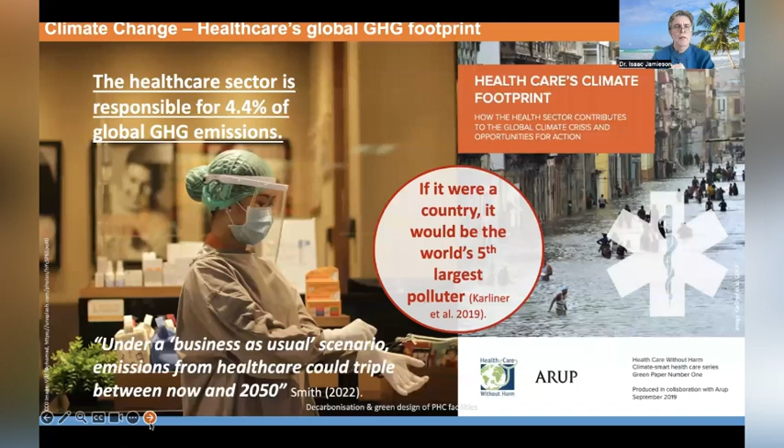One of the effects of climate change is the increasing prevalence of heat waves, and the effects of these are far worse during high humidity conditions, where it's more difficult for the body to cool down. It's been shown that the highest wet bulb temperature humans can typically survive in for up to 6 hours is around 35 degrees centigrade.

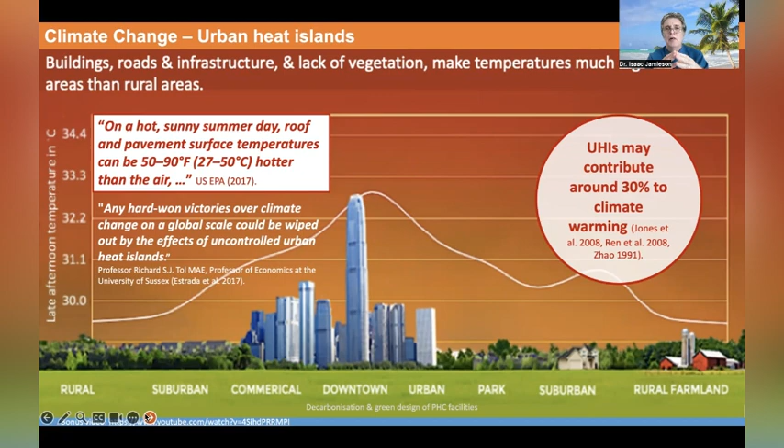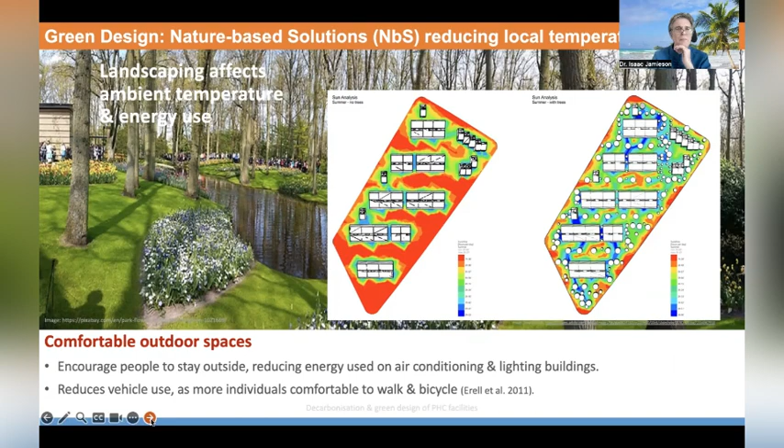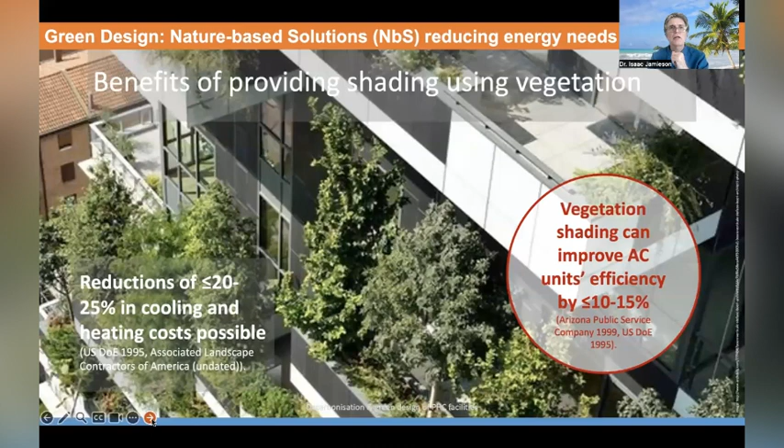So the kind of outer landscaping and designing that we have for buildings and the surroundings can make a big difference. With regards to the buildings themselves, if you have vegetation providing shading for them, it can help reduce both the cooling and heating costs by up to around 20 to 25%. And for areas where you have excess heat, shading the AC units can improve their efficiency around 10 to 15%. So these are significant changes that can be made using nature-based solutions.

And it's been shown that for buildings of 3 stories and less, you can often have a 5 to 15% reduction in electricity use during summer periods because of the reduced cooling need that's brought on board by the use of the green roof.

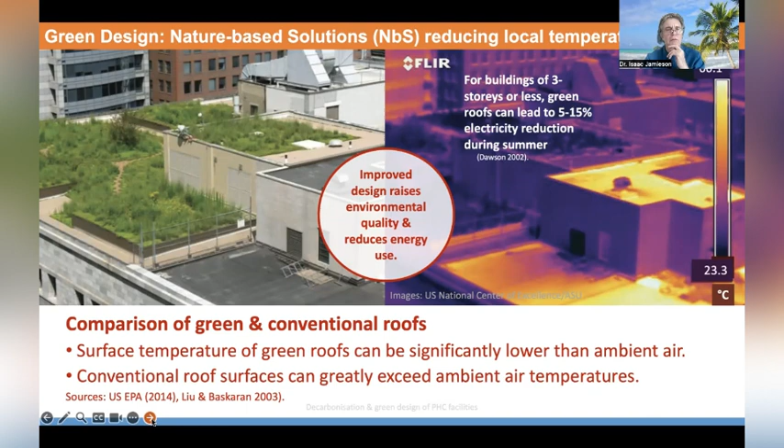Green roofs can actually provide significant additional advantages as well. They can help act as capture areas for rainwater to hold them during extreme weather events. They can also be used for growing food to increase food security.

A further benefit of this is that it's been shown increased contact with nature can help improve the human immune system. So you're getting a whole raft of benefits being created by this additional initiative.

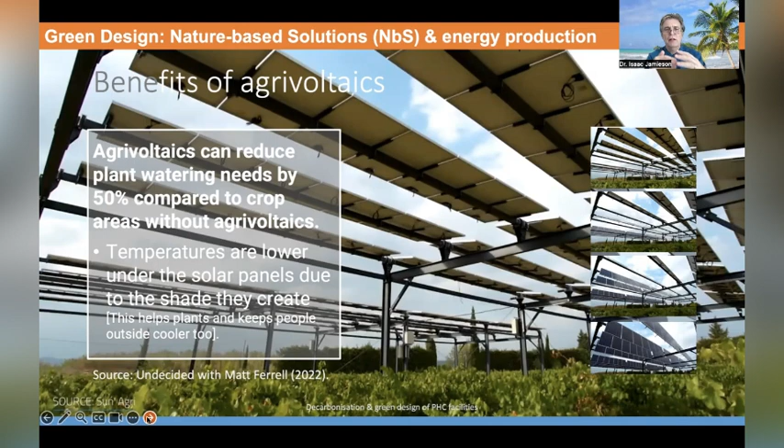Taking things even further, you can have green roofs that produce food that also produce energy for you. This is basically the agrivoltaics process - agriculture and photovoltaics being used in the same location. With the addition of photovoltaic panels, you can actually reduce the watering needs of the plants, and give them shading during specific times of the day. With systems such as the one shown here, they're actually adjustable, so you can alter the angle during the day so the plants get the correct amount of light and shade they need to optimize their growth. That can also help protect them during strong rainstorms, etc.

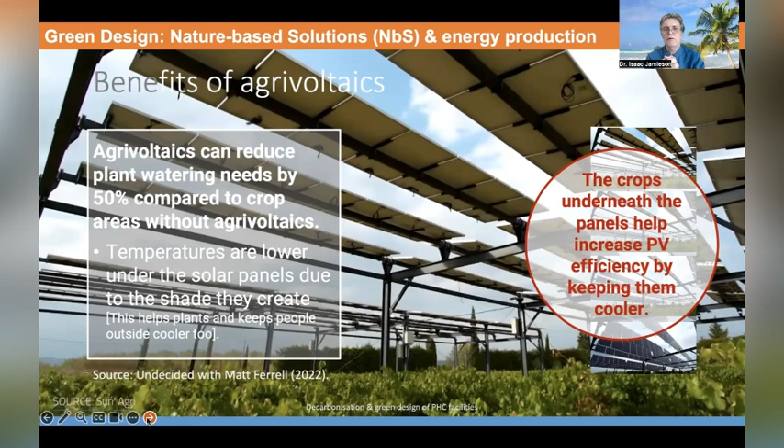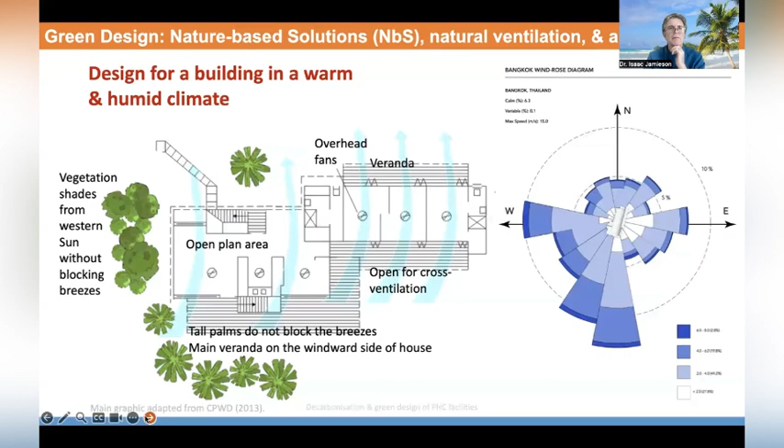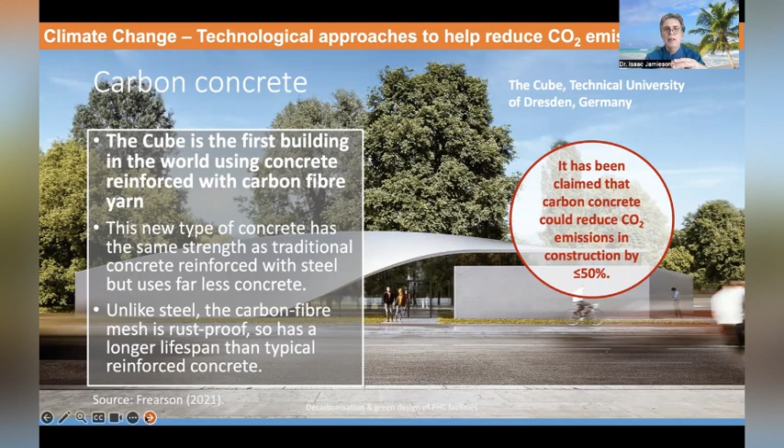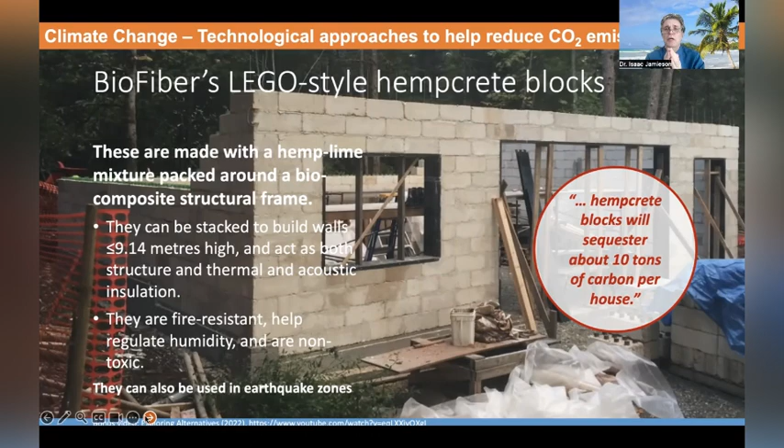Another material that can be used is hempcrete blocks, as you can see here, which are a hemp lime mixture packed around a biocomposite structural frame. They can be stacked to up to 9.14 meters in height. They're both structural and insulative in terms of acoustic and thermal insulation. They're also fire resistant, help regulate humidity, are non-toxic, and can even be used in earthquake zones. A further bonus is that for a building the size of a typical house, it can sequester around 10 tons of carbon.

Another material increasingly used now within the building industry is biochar, which is created by burning biomass at very high temperatures. It can be used in concrete, exterior render, insulation for bricks, plaster, etc. It's 100% natural and it captures and stores CO2, so you can have buildings designed using this potentially acting as carbon sinks.

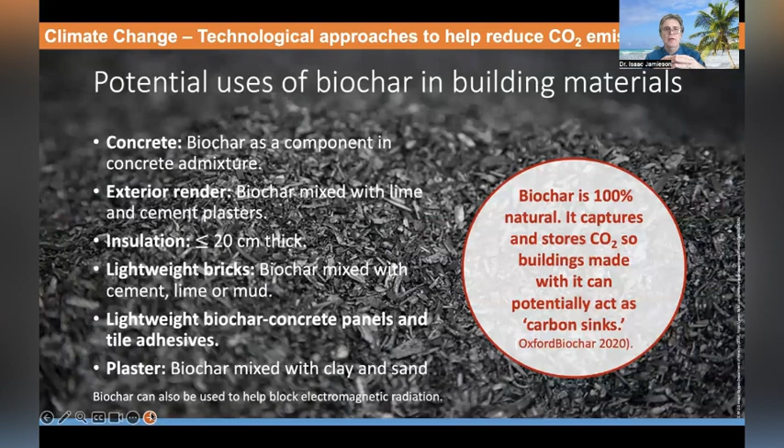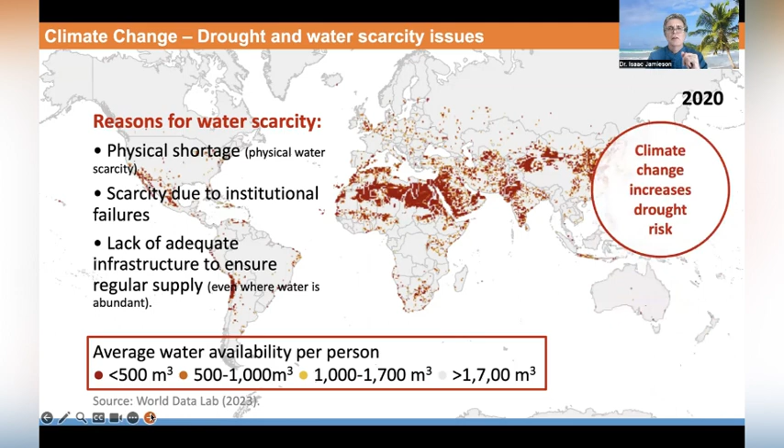Moving on now to water security issues, you have drought. This can be quite significant in many areas of the world. This illustration is showing the areas where high levels of drought can be observed generally throughout the year, and the next slide shows the actual situation that can occur in the drier months. Due to climate change, we're having increased incidences of drought occurring around the world, so it's quite a significant problem, affecting people in both rich and poor countries.

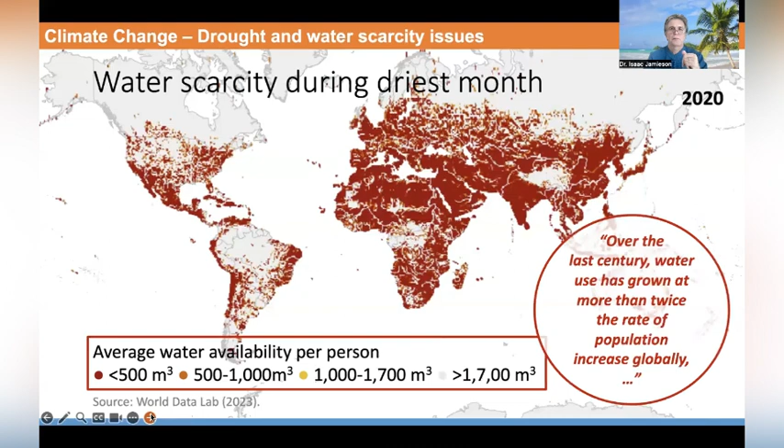Okay, so on we go. There are a variety of measures you can take to help address drought risk. One of these is actually using less water. Sometimes the contributory solution to this can be quite simple, such as fixing leaking taps and cisterns, which can save thousands of litres a year of water.

You can also do things such as install aerators on your taps, which can allow you to have the same washing experience, but significantly reduce water use, almost up to 90% through using such technology.

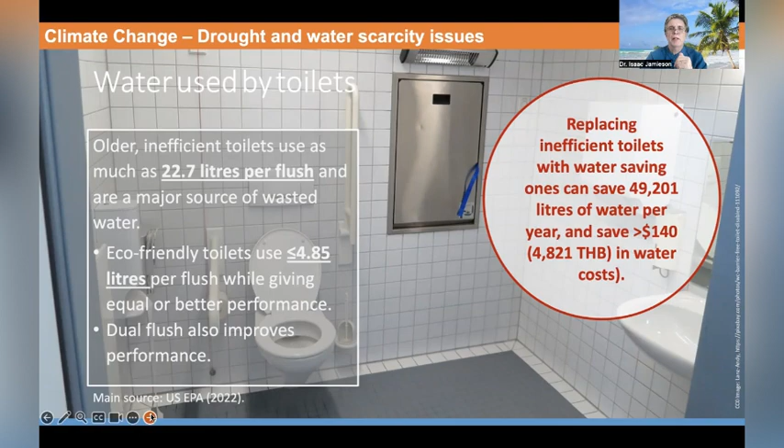Another thing you can do to cut down on your water use is by using water-efficient toilets. Eco-friendly toilets can use around 4.85 litres per flush compared to 22.7 litres for the old-fashioned toilet. You can make significant water savings in commercial premises, public buildings, domestic homes, etc., through introducing such measures.

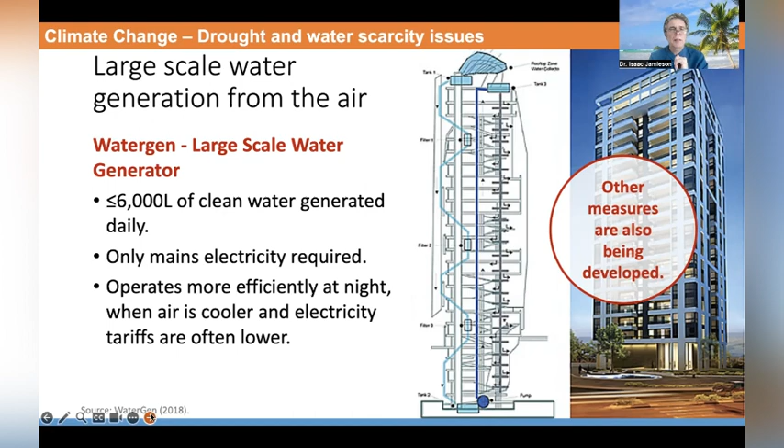Another problem we have to think about is sea level rise. Lots of countries are experiencing increased levels of floods. Bangkok is actually the country presently slated to have the highest risk from sea level rise by 2050. A variety of measures can be taken to help reduce such risks.

One of these is the concept of the sponge city. You introduce lots of green areas with parks, trees, and also lakes, etc., that can capture rainfall, acting as a collection point instead of the water spreading into the areas where we're living to such a great extent. The person who came up with the main concept for that is Dr. Kongjian Yu, who's seen in the illustration there.

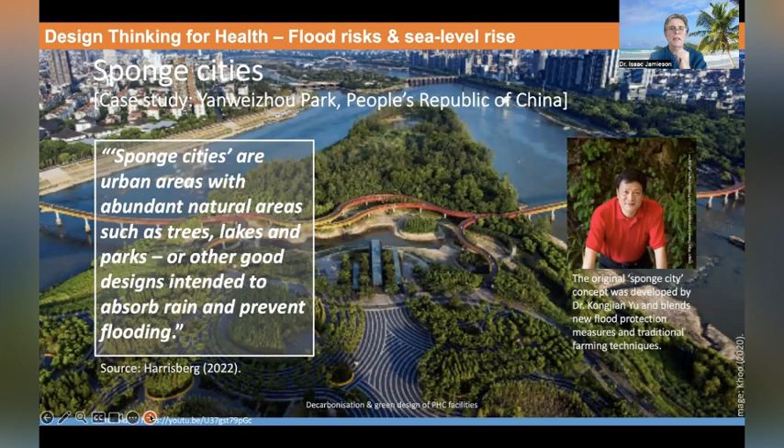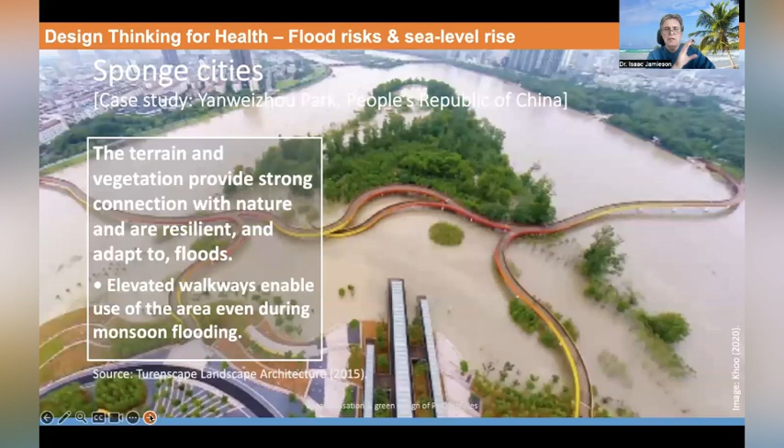This is an illustration of the Yanweizhou Park in the People's Republic of China during normal conditions. The next slide shows the same location during flood conditions to show how it operates. As you can see, it's able to capture a lot of water to prevent overflow, or at least greatly reduce the effects from that. With the high level walkways it has, it's still allowing people to access the areas they would under normal conditions.

Locally, you can also take measures to help reduce the likelihood of flood risks, and a wide variety of measures can be undertaken. Stormwater planters can be one of these, where you're collecting the runoff in specially prepared areas, which can help filter the runoff as well, reducing the loading in the area and the likelihood of flooding.

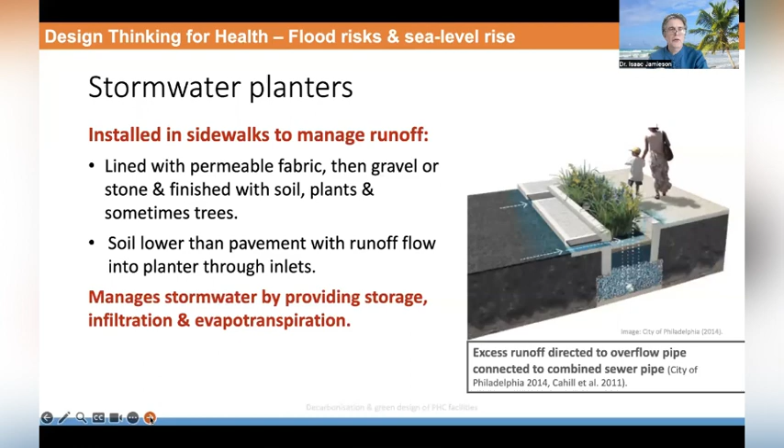There are other kinds of measures you can take on board around your building, such as green parking. You can have parking lots designed so that they can actually capture water to a far higher extent. As part of this, you can introduce bioswales, permeable pavements, permeable road surfaces, and even rain gardens.

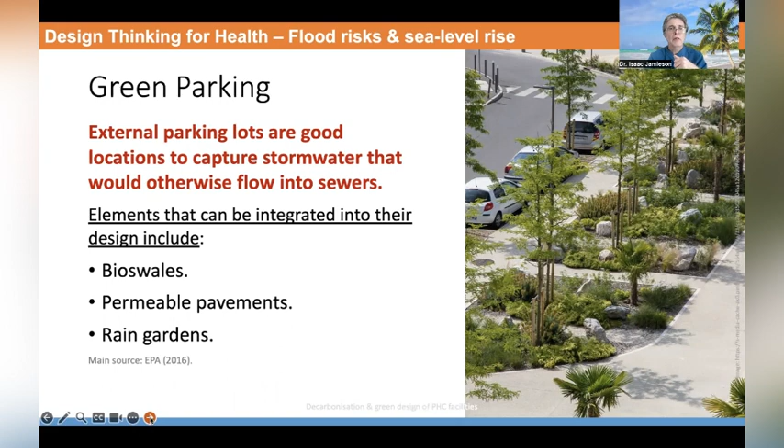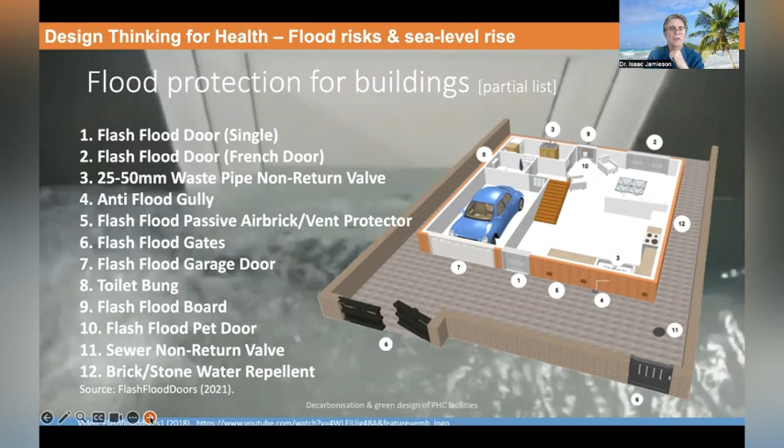Other measures for protection are in the fine detail of the buildings you're designing. You can have things such as flash flood doors, anti-flood gullies, non-return valves on your pipes so you don't have backflow happening, which can sometimes bring raw sewage into your building. So you can seal the outside of the building and reduce the likelihood of foul water coming in through toilets and sinks, etc., through such measures, greatly increasing the resilience of your building. You can also take other measures, such as having your plug points at high level, etc., to reduce any likelihood of flood damage.

Another measure you can take is things such as an aquadam, which can be used to protect individual buildings or groups of buildings. It's basically like a large bicycle tire that is filled with water around the time flooding is starting to occur. It can be very quickly activated and provide a high level of protection. As you can see by the soundbite there, a group of trained people could install a 4x100 foot sandbag dam in a little over 4 hours.

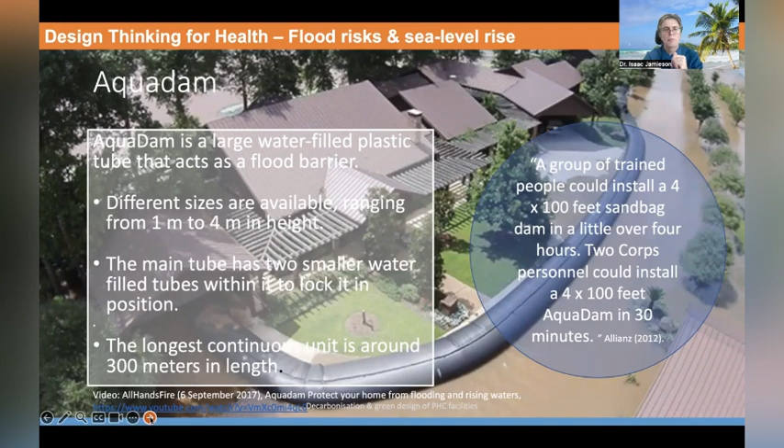Alternatively, if you have two people installing an aquadam of similar size, it would take around 30 minutes. So if you've got very little notification or very little manpower available to take protective measures, this could be one kind of solution that could be of interest to you.

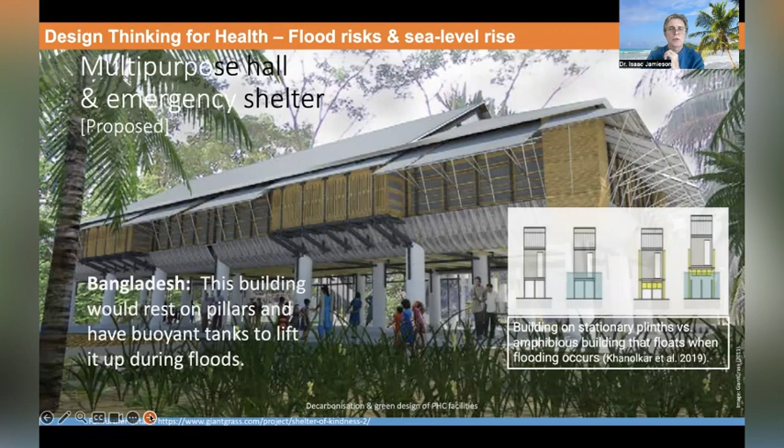You also have cities now under development in various places around the world that are floating to help address such risks. You've got the Maldives floating city being one particular development, which also has a hospital situated within it. And you have the Oceanix Busan in South Korea, currently under construction, with the UN involved in its development.

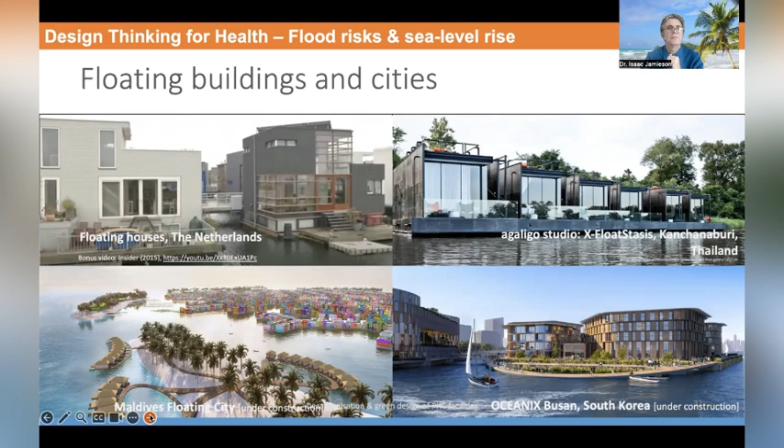Okay, on to the final part of this, looking at how well-being and infection risks can be taken into account when you're using design thinking for health.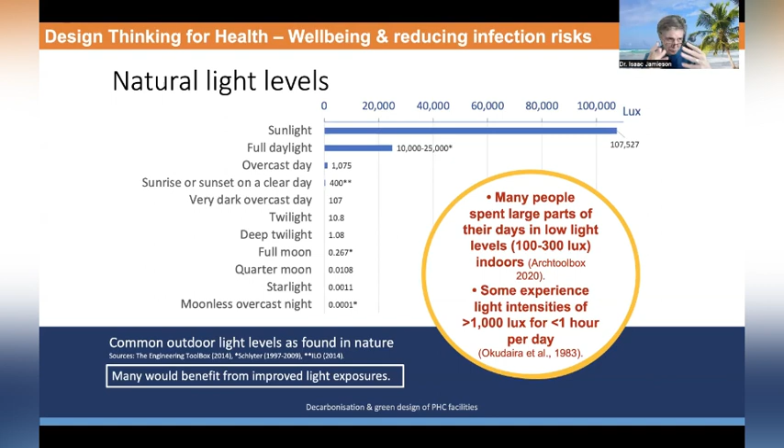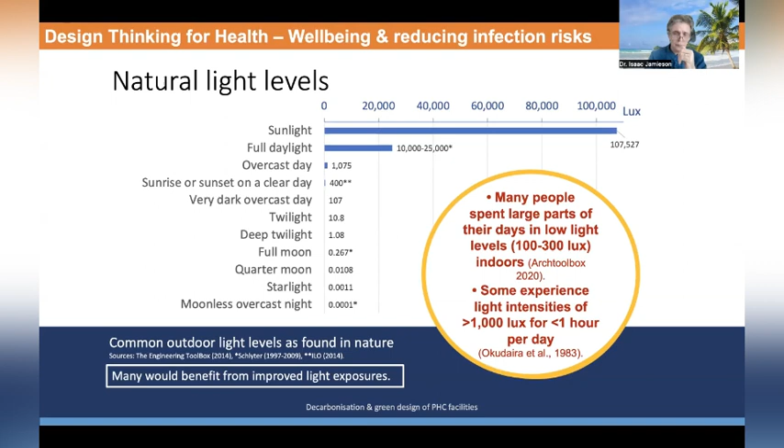Often the buildings we design have got very low light levels. Outdoors in sunlight, you will be exposed to over 100,000 lux, and in full daylight, around about 10,000 to 25,000 lux. But indoors, many people are spending large parts of the day in low light levels of around 100 to 300 lux, and many of them seldom have exposures greater than 1,000 lux for over an hour a day. As well as being wasteful in terms of energy use, with artificial lighting having to help increase people's exposures indoors, there can be detrimental health effects from such exposures.

This is something that has been known about for a very long period of time with regards to the design of healthcare buildings. As an example, Florence Nightingale back in 1860 said, and I'll read the quote for you: 'It's the unqualified result of all my experience with the sick that second only to their need for fresh air is their need of light. And that after a close room, what hurts them most is a dark room, and that it is not only light but direct sunlight that they want.' So what we should be doing is looking more into the biological needs of the people who occupy these spaces, whether they're patients or healthcare staff, so we can help optimize their exposures.

As an example of this with regards to infection risk, it's been shown that if people are experiencing higher levels of daylight during the day—in this case, the testing looked at people working next to windows versus people away from window areas—you can have a difference in the amount of melatonin the body produces at night.

Melatonin is the hormone that the body uses to heal itself. It's been shown that if you have increased levels of nighttime melatonin, it can help protect you against a wide variety of viruses, including the coronavirus.

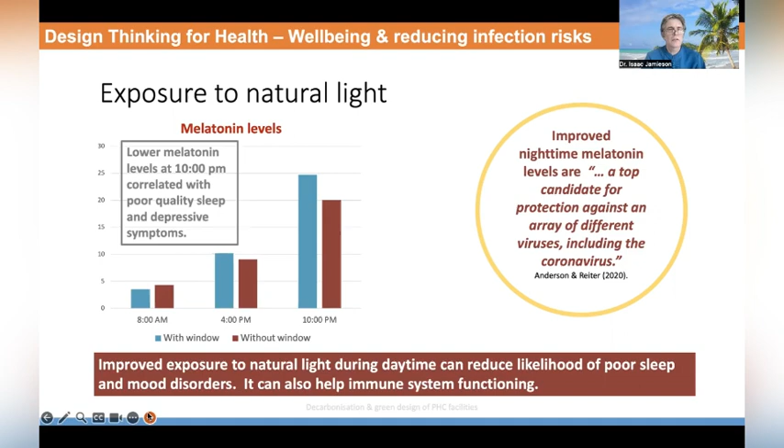Looking back over the bar graphs, you can see that when people have been sitting next to a window during the daytime, at night their melatonin levels are far higher than if they'd been sitting away from a window. So natural daylight can be a big boost to the immune system. It can also help improve sleep quality and reduce the likelihood of mood disorder. So you've got lots of benefits that can help there.

Okay, other benefits of natural light. It's been shown that the time of day is really important with regards to when people get exposure, so you can help design your buildings accordingly.

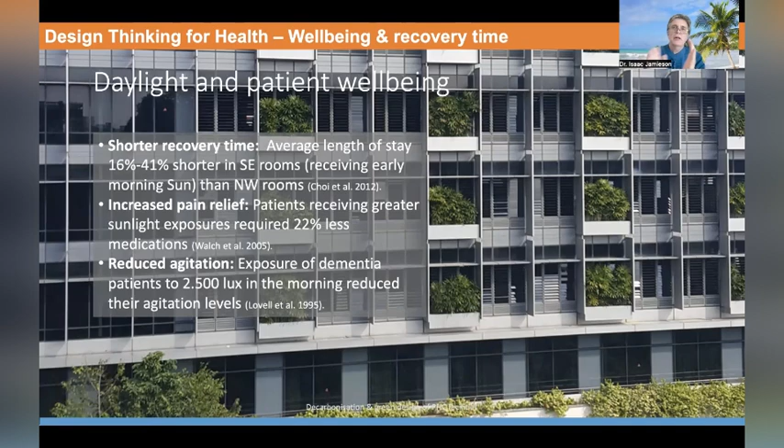It's been shown with patients that if they receive natural daylight and sunlight through the windows first thing in the morning, they have a shorter recovery time, around 16 to 41% shorter. They have increased pain relief, so they don't need as much medication, and also reduced stress levels. These are all really important things to take into account when you want to increase the efficiency of the health services you're providing, and reduce the amount of your budget that has to go on medication for individuals.

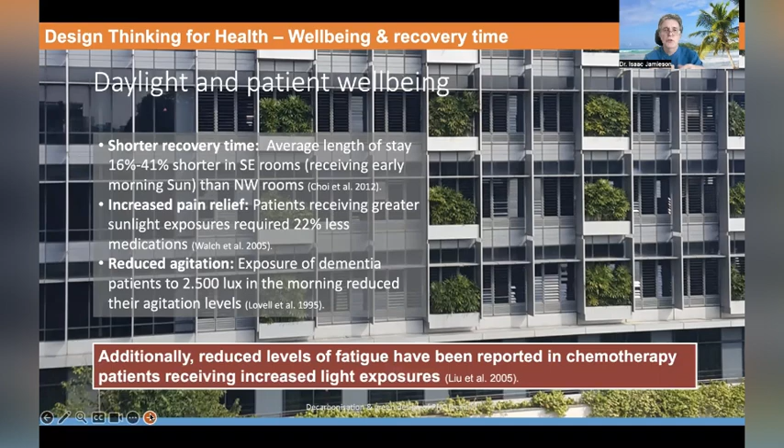It's additionally been shown that people recovering from chemotherapy who have increased light exposure experience reduced levels of fatigue, so you're getting further levels of benefit from that.

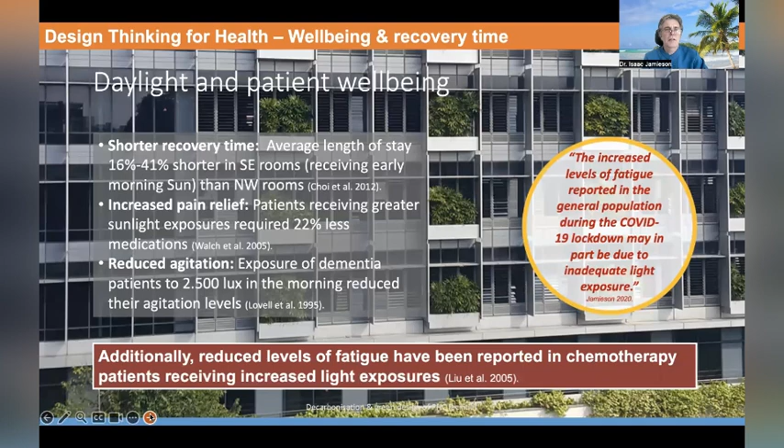Previous work I've done has also indicated that potentially the reason lots of people were feeling fatigue during the COVID-19 pandemic was basically that they were locked down indoors. They were experiencing low levels of light, so their body wasn't set up to be as active as it otherwise would be, so they were getting tired far easier.

With regards to pathogens, it's also been shown that natural daylight and sunlight can kill pathogens, so this is something that should be taken into account in your designs.

Back in 1877, it was shown that sunlight can be used to sterilize microbes, and the sterilization effect was noted with light that passed through both clear glass and blue-colored glass. But microbial growth still occurred with glass that was red-tinted or yellow-tinted—ones which blocked blue and violet light within the natural visible spectrum.

This is something that is not generally taken into account in the design of buildings and the specification of glass. Normally, the kind of glazing we use for energy efficiency and for blocking heat ingress blocks out those parts of the light wavelength. So the blue and violet part of the visible spectrum that can kill pathogens are also often greatly reduced in concentration with many modern types of glass.

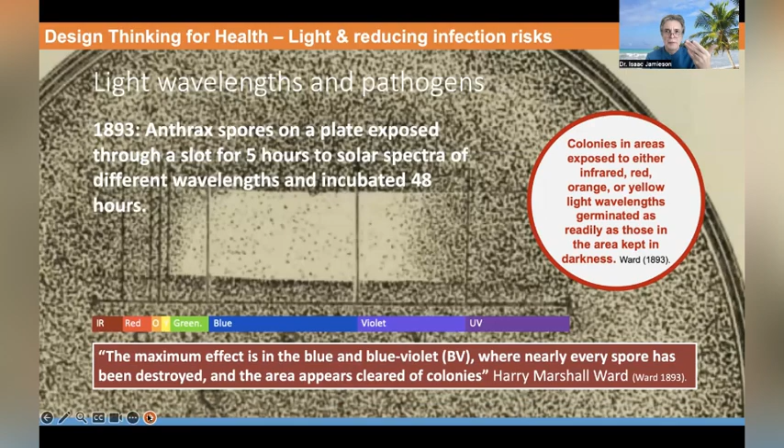Here's another example from way back showing the effectiveness of the blue and violet part of the spectrum at inactivating pathogens, in this case anthrax spores. A spectrum of light was shone onto this dish for a 5-hour period, and it was shown that with blue and violet light you get increased amounts of inactivation, but the colonies exposed to yellow, orange, and red light germinated as readily as the ones kept in the dark. This is a really important detail to take into account when you're designing.

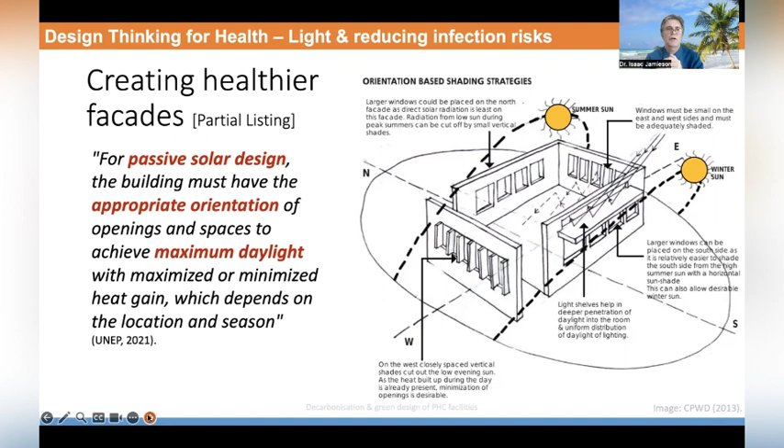Also, when designing, you can take into account solar path diagrams—how sunlight passes around the buildings—and the kinds of measures you can take to optimize shading within the building, and also to optimize light ingress, so you get the maximum biological benefit for the individual while also addressing infection risks with the same measures.

Quick summary: there are many measures that can be taken to address the challenges we face. Multi-layered thinking, where you try to think about how you can create numerous levels of benefit, can often help you achieve the best outcomes. And that is it.